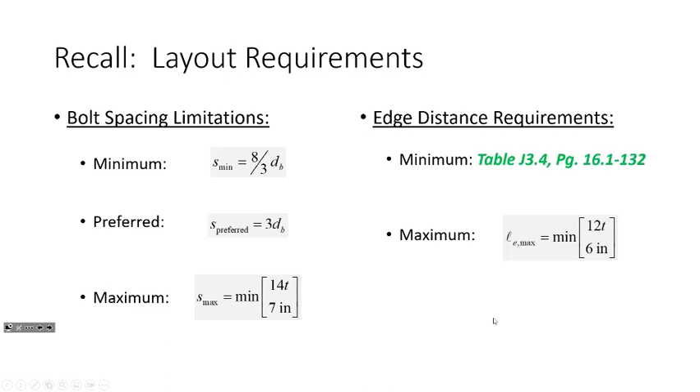And then lastly, the layout requirements. We're going to use those layout requirements for the purposes of design today. But up until now, they've really just been a check—a means of checking whether or not the connection meets both bolt spacing and edge distance requirements. Remember, if bolts get too close together, you can't tighten them. The minimum edge distance requirement is there from a fabrication perspective as well. But if they get too far apart, you run the risk of allowing water in between the plates, which leads to corrosion, and corrosion's no good. So those are the reasons for your layout requirements. Again, meeting layout requirements doesn't mean that you meet bolt bearing capacity—those are separate concerns. Now what we need to do is talk about design.

Design of a bolted connection is pretty easy. What we do is we determine the factored load, we determine the shear capacity of a single bolt, and then we divide to get the number of bolts. That's pretty much it.

Once we get that number of bolts, select a pattern accordingly. Let me talk about that a little bit. When you compute the required number of bolts, it's not going to come out to be a nice, pretty number—it's going to come out to be like 14.62 bolts. So round that up to 15 bolts. Does that mean a line of 15 bolts? Or does it mean maybe a grid of 3 by 5, or 5 by 3—some sort of pattern that makes sense? Typically, you will want to collect that pattern as much as possible.

Dependent upon your geometry, I see folks do this all the time: let's say the number of bolts required is 22.36. The engineer in me says, well, do I want to round that up to 23 bolts? I could, but 23 doesn't work out in a nice, pretty grid, so maybe I'll say 24, because I could use a 4 by 6 or some neat pattern that makes sense. Now, I could go with something like 23 bolts and develop a staggered configuration—I could do that. But for the purposes of this class, I want to keep it simple, so typically I want to collect that into as grid-like a pattern as possible.

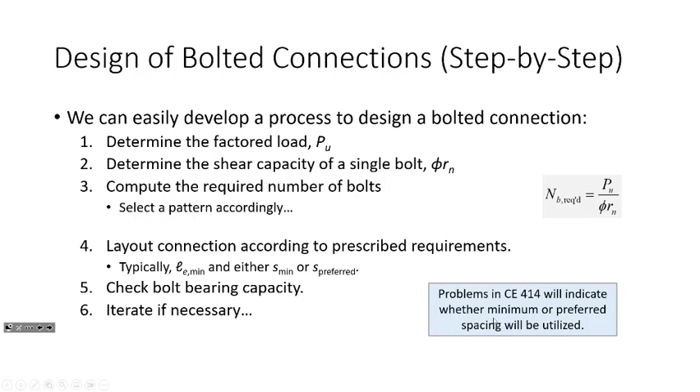Let's talk about the globally potential options you might have with iteration. The whole point of checking the connection is to ensure it meets bolt bearing capacity, bolt shear capacity in design mode, and bolt slip capacity when looking at slip critical connections. There's no ambiguity there—if you solve for the required number of bolts and choose a number bigger than that, it will work. The bolt bearing check is the one that's iffy.

Now, if the connection fails in bolt bearing, you have a few options. What I think is easier is to increase the bolt spacing or the edge distance. If you increase your bolt spacing by just half an inch, that might be enough. That's usually the way to go if you just need a little bit more capacity—just up your spacing a little bit. Obviously you can't increase beyond the maximum, but that shouldn't be a problem in design mode.

Another thing you could do is stagger the bolts. Staggering would slightly increase the bolt bearing capacity because some bolts will have a larger edge distance, but that only slightly increases your bearing capacity. The real benefit of staggering is increasing your net area for net section fracture. For bolt bearing, it'll help a little, but not a lot.

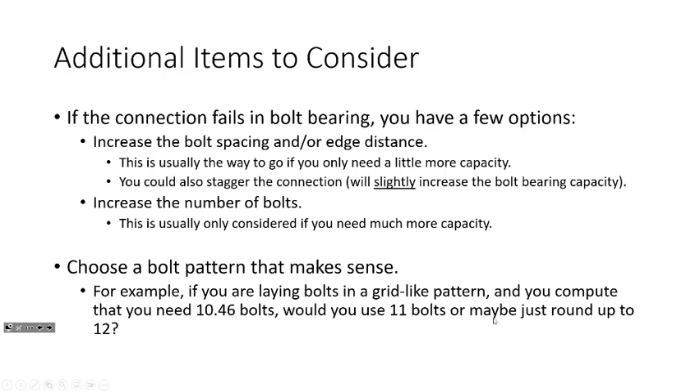I've mentioned this before, but I'll say it again: a lot of fabricators in the real world love to lay out their connections in 3-inch grids, using an edge distance of 3 inches and a bolt spacing of 3 inches. I'm going to require minimum Le's and minimum S's for our designs, but I mention this because you'll see it a lot in the real world. The reason for 3-inch grids is that a 3-inch bolt spacing and edge distance meets the requirements for 3/4 inch, 7/8 inch, and 1-inch diameter bolts—the three most common bolt diameters used in steel construction in the United States.

So if you use a 3-inch grid, that drilling pattern tends to work for just about any bolt you would use in any project. If you have a large project with a lot of repeated connections, using regular increments like that can help the fabrication process. Even if it's a little inefficient on the design side, it can be really efficient on the fabrication side, because you're just doing the same drilling over and over again.

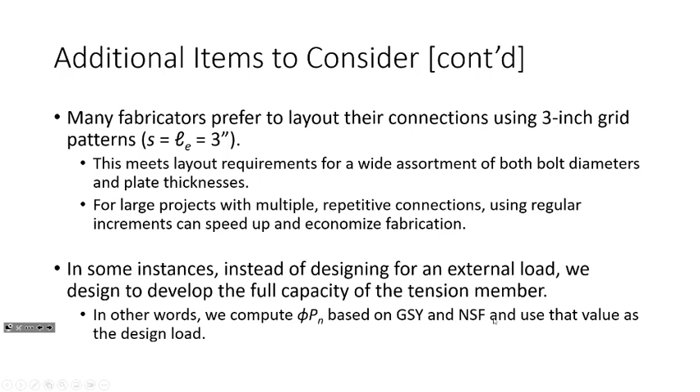I talked about this bullet last time. I'm going to mention today how this would impact a design where, instead of designing for a load, we design to develop the full capacity of the member. In other words, we compute the load based on whatever the phi Pn is for gross section yielding or net section fracture, and actually use that as our design load. So however many bolts we pick, we know it's good, because if we start failing the member, it's not going to be because of the connection—it's because gross section yielding and net section fracture was our governing limit state. I'll show you where that applies here in this example.

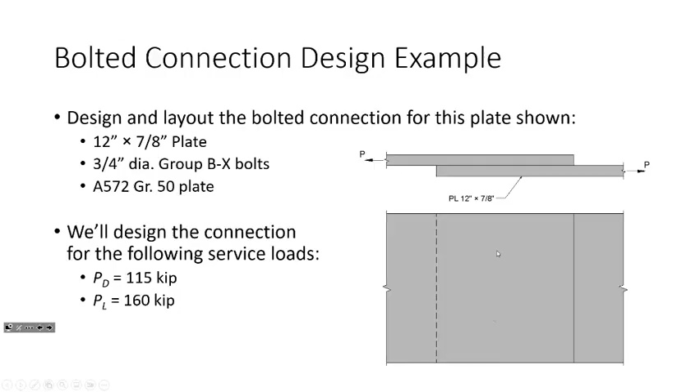So this is going to be our goal for today: to design and lay out the bolted connection for this plate shown. I have a 12 by 7/8-inch plate, 3/4 inch diameter Group B-X bolts. Let me pull this up here. And we have A572 Grade 50 plates.

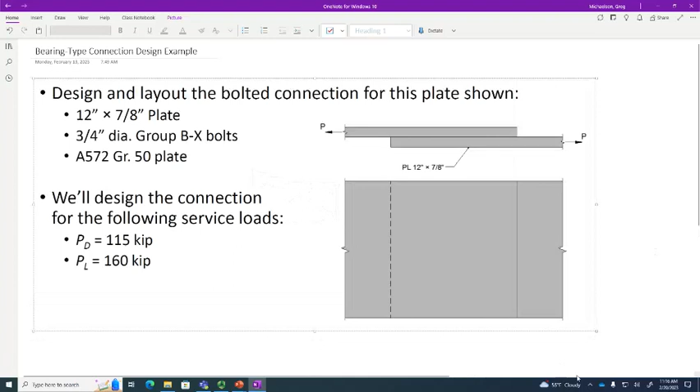I've changed it up a little bit in terms of the parameters we've been using, because we haven't really been using a lot of A572 in our examples in class. So I said, what the heck, let's spice it up a bit.

So we have service loads of 115 kips of dead load and 160 kips of live load, and we're going to be laying out the connection. All I know for the purposes of this design is I have a 12 by 7/8 inch plate lapped onto another, and I have no idea how I'm going to connect them.

One thing we can identify using common sense is that we have bolt shear and bolt bearing to check, but for the bolt bearing limit state, it's the same member, right? We have a 12 by 7/8 inch plate lapped onto a 12 by 7/8 inch plate, so we don't need to check two cases of bolt bearing like you might have had to do on the last homework assignment.

Did that make sense on that last homework assignment, how there were two cases—the W shape and the cover plates? I think you found by observation you could ignore one of them, because one had a lower Fu and a lower thickness, so there's really no point checking the other one. You can check both if you want—I think in the solution I checked both just to show you that one isn't going to govern, but I'll do the math to show you.

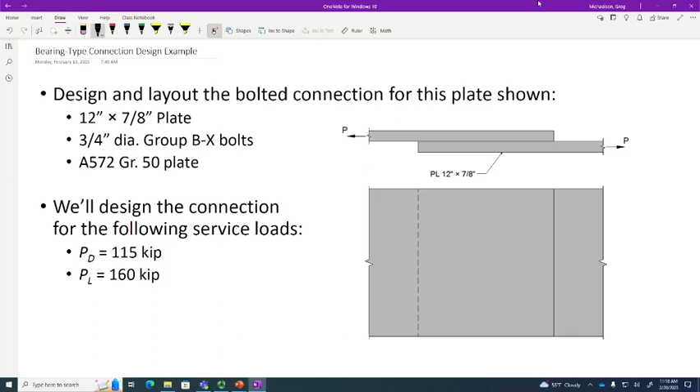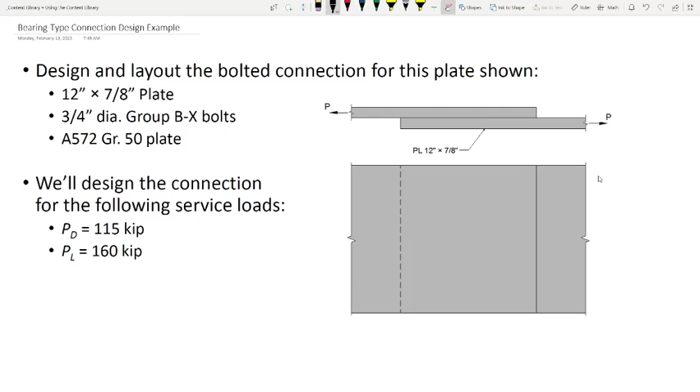Okay, let's get into it. So our first step is going to be to compute the factored load, right? Where'd my pen go? There it is, it's all tangled up here.

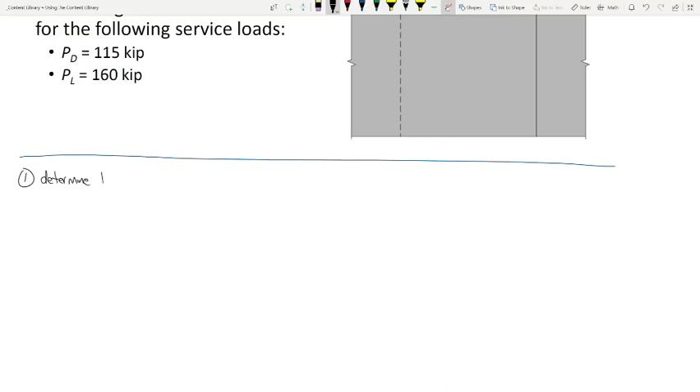By now this should be pretty easy, right? 1.2 dead plus 1.6 live. I don't think that's terribly confusing. So this is 1.2 times 115 kips plus 1.6 times 160 kips. When we chug that out, what do we get? 394. Do I have a second? Yep, okay.

Now I want to take a little bit of a deviation over here off to the side.

So if we were designing to develop the full capacity, what we would do is say, in that realm, if I said to design to develop the full capacity, I would not be giving you a dead load or a live load because you wouldn't need it, right? The whole point is you don't need a load because you're using the member to generate that load.

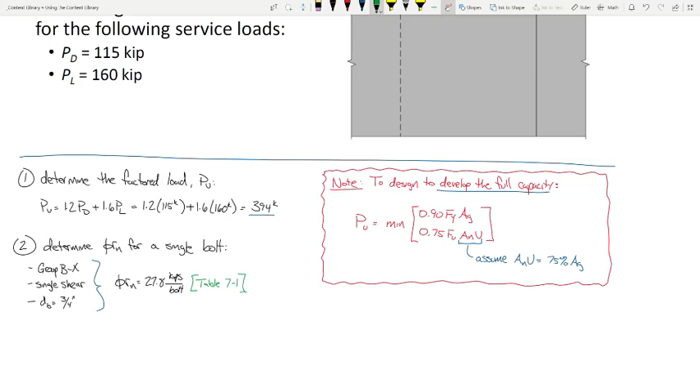So next, number 3, determine the required number of bolts. So I have 394 kips on the connection, I have 27.8 kips per bolt. So pretty easy. This is 394 kips, so 394 kips per bolt, and if each bolt can hold up 27.8, how many bolts do we need to use? Well, what does this formula yield?

14.17. So how many bolts do you think we should try out for this connection? 15, right? So we'll say try 15 bolts, so we'll break that.

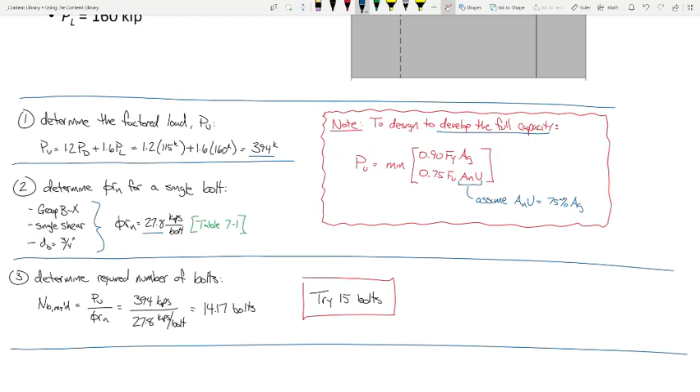So now we got to lay them out, okay? We need to look at bolt spacing and bolt edge distance requirements. So now we need to lay out the connection. So let's lay this connection out. What is Le min going to be? 1 inch. And where'd you get that? J3.4. There you go. This is table J 3.4, right? Okay.

Now what about S min? We're going to use S min for this problem. S min is what? That one's a computed value, right? It's a fraction times the bolt diameter. What's that fraction? 8/3. So what is that? That's 2 inches? Yeah, okay, all right.

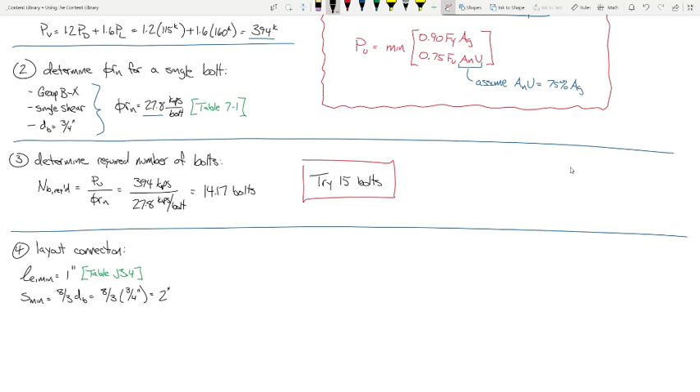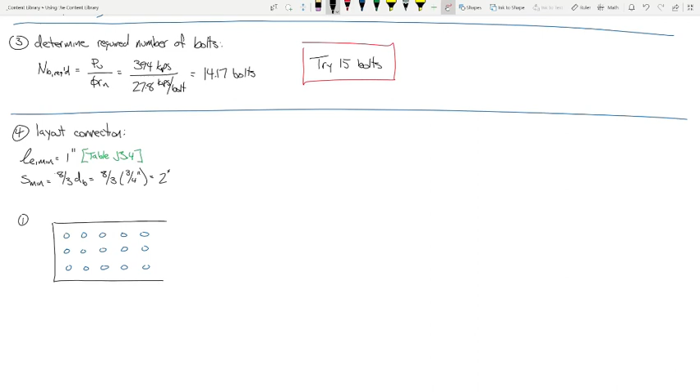Now we go back to 3rd grade and we say 15. If we factor that, that goes 3 times 5, right? But it can also go 5 times 3. So that begs a question. We have 2 ways of laying out this connection. Option 1, that's option 1, right? Okay. But now hold on, here's option 2. Let me do this another way. Option 1, option 2. I'm drawing it a little bigger because I'm going to have more holes here, but the dimension's the same.

All right, now what would be the advantage of option 2? Well, option 2 would require less plate for it to connect to, right? Option 2 only goes out here, option 1 goes all the way out here. We would need more of that plate lapped onto it, right? That's going to cost money, right? So I am wanting to make this connection as compact as possible.

But is this going to work, right? Well, let me ask you this. If I space everything out evenly, okay, remind me, what is this dimension right here? What is that dimension? 12 inches. So if everything's spaced evenly, what's that dimension right there? How many gaps? 1, 2, 3, 4, 5, 6. If everything's even, what is that dimension? 2 inches. Is that going to meet our requirements?

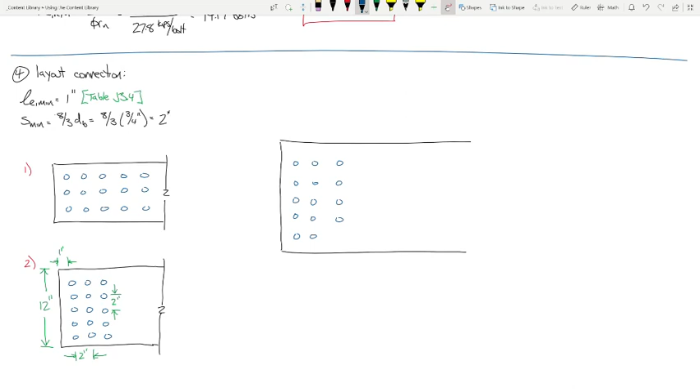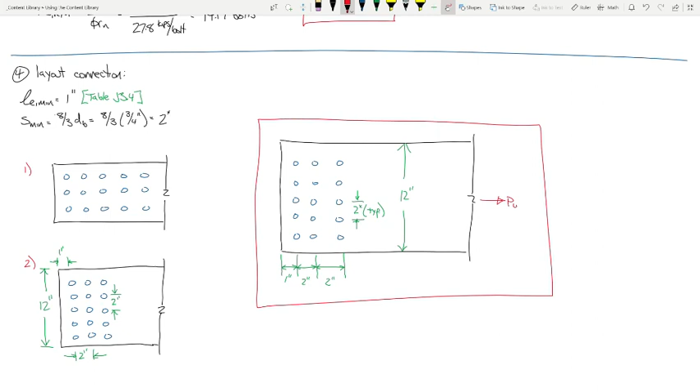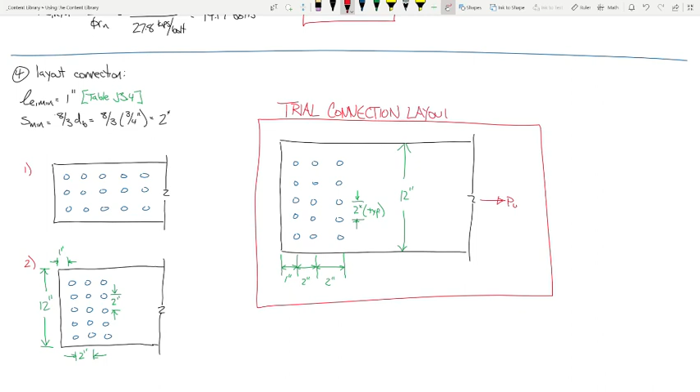Again, forgive my horrible scale here. This is 1 inch, 2 inches, 2 inches. This dimension here is 2 inches typical. This is 12 inches. This, and I'm yanking on it, you know, like that. That's my trial connection layout right there.

So the point I'm making is if I check bolt bearing and bolt bearing works, that's the answer. This is the answer, not x equals 3, right? This is the actual answer, this connection design. Does that make sense? But we don't know whether or not this is going to work because we have to check bolt bearing, right? And remind me, what was our factored load on this problem? What was PU?

So we need to ensure that we have enough bearing capacity, bolt bearing capacity, such that the φRn is greater than that. Now, before we move on, I just want to make sure that everybody's paying attention. Ahead of myself.

How many edge bolts are in this connection? How many interior bolts are in this connection? 5 and 10. These are my edge bolts, these are my interior. Okay, all right, does that make sense?

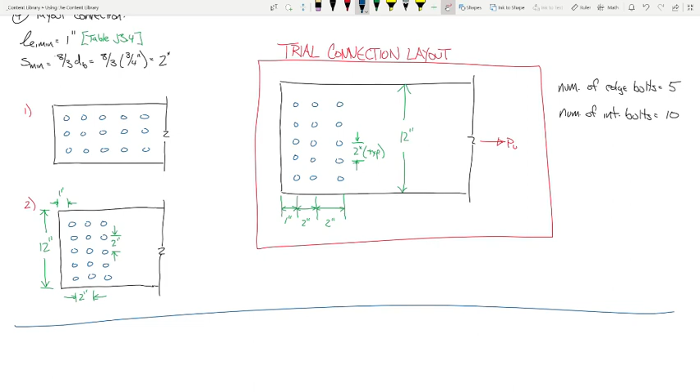If that makes sense, the rest of this is not hard. It's just a bunch of calculations, like it's rote, pretty step by step. Everybody with me? Second? All right, so now let's check bolt bearing.

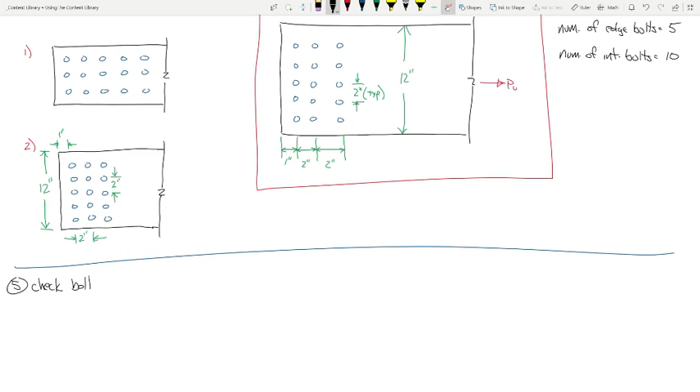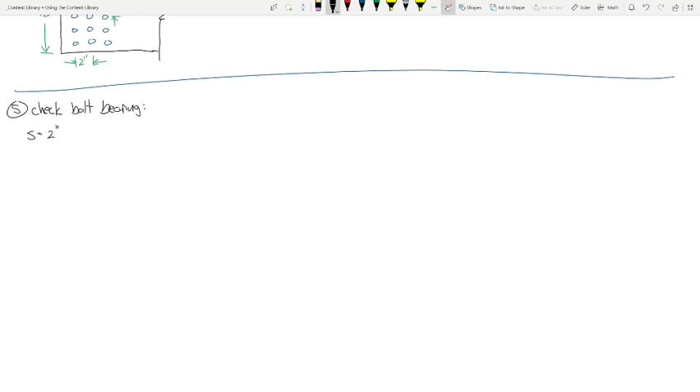All right, check bolt bearing. So in order to check bolt bearing, we need some values. So we have S is 2 inches, we have our edge distance is 1 inch, right? And one thing I want to make sure I'm clear on, these edge distance requirements and bolt spacing requirements, remember, they are independent of what load you're putting on. They're for different reasons. So you have to make your bolt spacing limit states both this way and this way, your edge distance requirements both this way and that way, okay? So make sure that you're adhering to both in every direction, right?

So we have a plate thickness we're going to need. What was the thickness of the plate for this problem? Was it 7/8? 7/8. We're going to need the bolt diameter, which is 3/4 of an inch. So therefore, the hole diameter is what? 13/16.

And finally, we're going to need an FU value. What is FU for A572 grade 50 plate? 65. 65 KSI. And this is table 2-5.

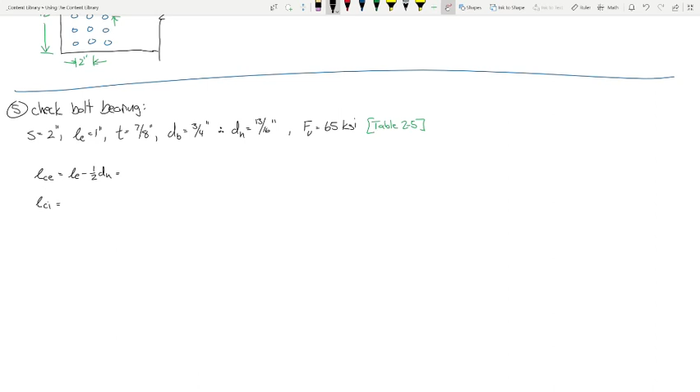Okay, so the rest of this is pretty rote, right? So what do we start off with? We start off with LCE and LCI. LCE is LE minus half of the hole diameter, which, if you're okay with this, I'm just going to go ahead and tell you, ends up being 0.594 inches. Is that okay? Right, and then the LCI is S minus DH, which that ends up being 1.188. So that's sort of the first step of calculations that you need to do.

Then the next step that you need to do is 1.2 LCE TFU, which ends up being 40.52 kips. Then 1.2 LCI TFU, which ends up being 81.05. And then 2.4 dBTFU, which that one ends up being 102.38.

So then we say that RNE is the minimum of the top one and the bottom one, which we can observe and see is 40.52.

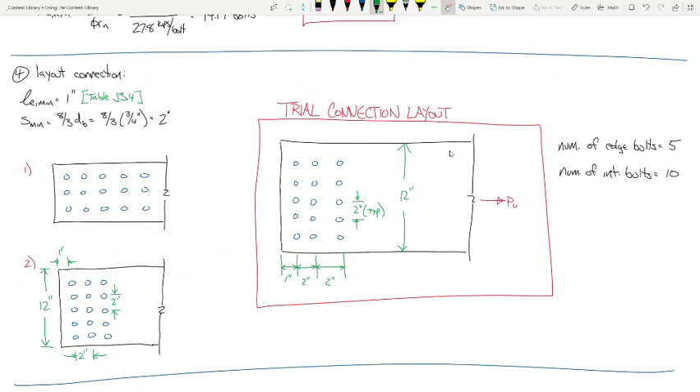So I'm basically saying that that's the answer. That layout works, that's our design. And that is bolted connection design in a nutshell.

I want to stop for a second and see if anybody has any questions about this so far, because I want to bring up a couple things and introduce the next lecture so that we don't get time crunched during our lecture on Wednesday. But you tell me, was this confusing, simple? Everybody good?

I want to ask you a question. We got 759.8 kips. My question for you is, what if we got 359.8 kips? What would that mean? I'm asking you.

It's not good, right? Because this is our load, this is our capacity, and when comparing the two, that would not have enough capacity. So I want you to go through that thought process in your head. We solved for the required number of bolts, we laid them out, we checked bolt bearing, and bearing's not good. So how do we fix it? Well, the problem is in this step, and this step was a function of all these different parameters right here. These were the critical parameters.

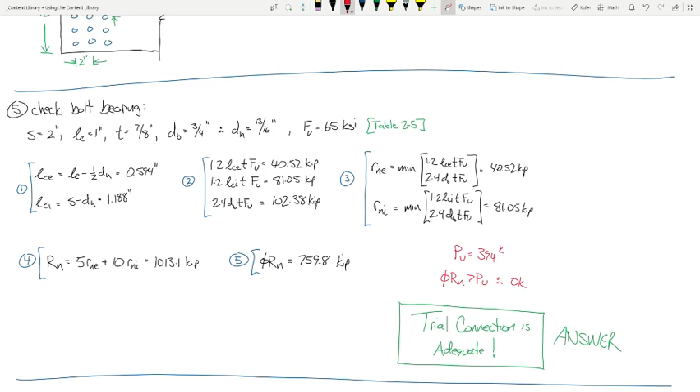So what I propose is, if for some reason your connection doesn't have adequate capacity, the problem is in that box right there. A lot of these you're not going to change at this stage of the connection layout, especially if the capacity is just a little bit lower. My advice would be to change one of these two, preferably the spacing.

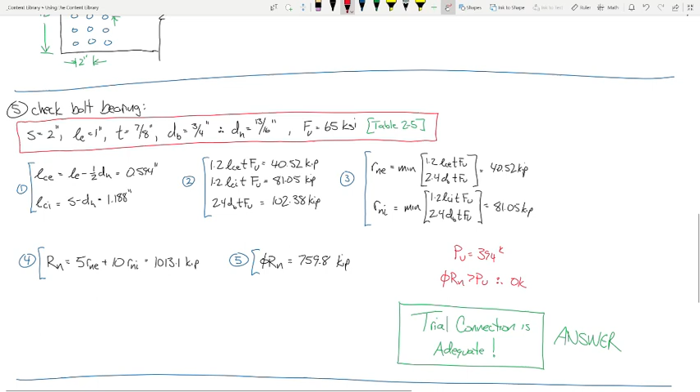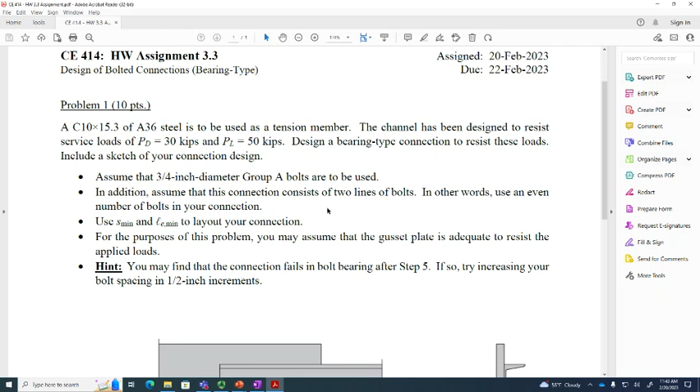So I want to pull up the homework and kind of make a point about what's going on in this next problem. So this is going to be the problem that you have to do.

So we have a C10 by 15.3. You're going to design this using a dead load of 30 kips, a live load of 50 kips. I want a sketch of your design at the end when it's all said and done. Assume that you're using 3/4 inch Group A bolts. One of the things I told you to assume at the beginning is that there's 2 lines of bolts, so it's 2, 4, 6, 8, 10, 12.

So whatever you calculate, round up to the next even number, and that's how many bolts you use, because you're using 2 lines of bolts. I want you to use S-min and LE-min to lay out your connection. For bolt bearing, you don't need to check the gusset plate, just check the channel, so that makes that part easier. But you might find that the connection fails in bolt bearing after step 5, and if so, try increasing your bolt spacing by 1/2 inch increments.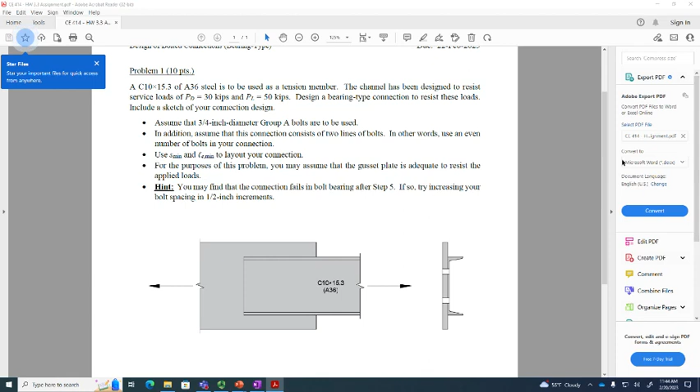I don't know what else I could say. You're giving me that look. I see what the iterations are for now that you speak of. Yes, these are the iterations I was talking about. It's not going to be that bad, but doing this correctly, you will most likely have to iterate. He said we'd have to iterate at least 3-4 times. I did not say that. You're trying to get me in trouble, Mr. Lingenfelder. I'll remember that, that's just what I heard. I don't know who told you that. I didn't. All right, we got a few minutes.

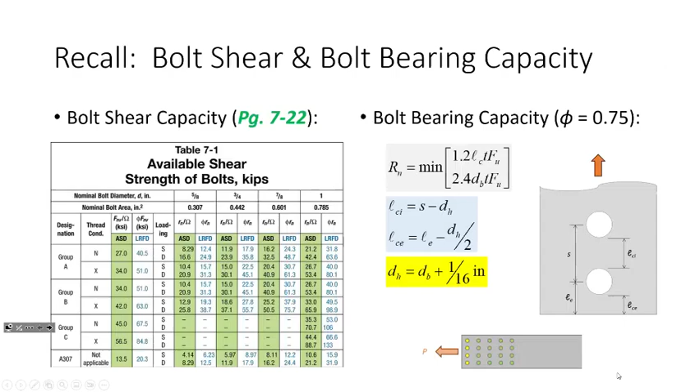I just want to introduce the concept of a slip critical connection, to give you an idea of how it works. In the process of designing a bolted connection, this is the process we just followed. Whenever you're doing a slip critical connection, the only thing that changes is step 2. Instead of just the shear capacity, we take the minimum of either the shear and the slip capacities.

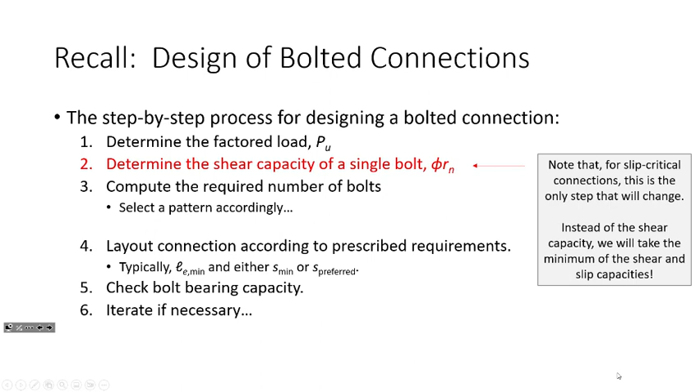So that means we have to talk about slip critical connections. I'm just going to introduce the idea, not get too far into it today since we don't have time for the details. But remember when we talked about a bolt assembly, there were really 3 mechanisms to resist load: the shear force inside the bolt, so if we exceed that, we shear the bolt in half; there's bearing on the plate, so if we exceed that resistance the plate will either mash up or tear out; but then the third was friction.

Friction can develop between the two plate surfaces as the bolt forces those plates into contact. Slip critical connections rely on that friction to resist the load. They're very common in bridge applications, and can also be used on joints with oversized holes or slotted holes, earthquake scenarios, or other places where slip critical connections get detailed a lot. So that's really where we see slip critical connections utilized.

Now, to install a slip critical bolt, first we have to get the bolts snug tight. That's actually a good question - what does it mean by snug tight? That's defined in the specification. Snug tight is the tightness you get either with a few hits of an impact wrench or the full effort of an iron worker using an ordinary spud wrench. Basically the idea is that snug tight has to get the contact surfaces firmly bearing with one another. Once that happens, you have to use a prescribed method to achieve the required torque.

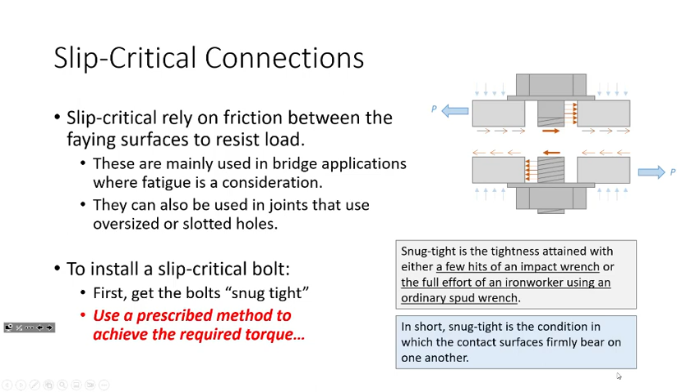And that's going to be a lot of what we talk about in class on Wednesday. I think I mentioned, for those of you that had been on a DOH site where they installed a steel girder bridge, did you see those? That's what these were - this is one of the prescribed methods. I want to give this its proper time, so we'll do that on Wednesday.